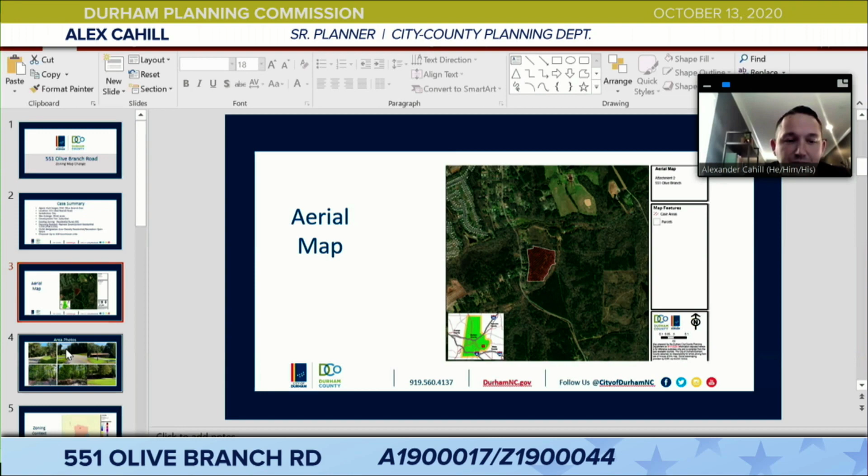The current FLUM designation is low-density residential recreation open space. This proposal is to build up to 108 townhouse units. You can see the aerial map showing the location of the site, right next to the intersection of Doc Nichols and Olive Branch Road, just east of that. You can see the area photos here—there's a lot of heavily treed areas surrounding and adjacent single-family homes near the property.

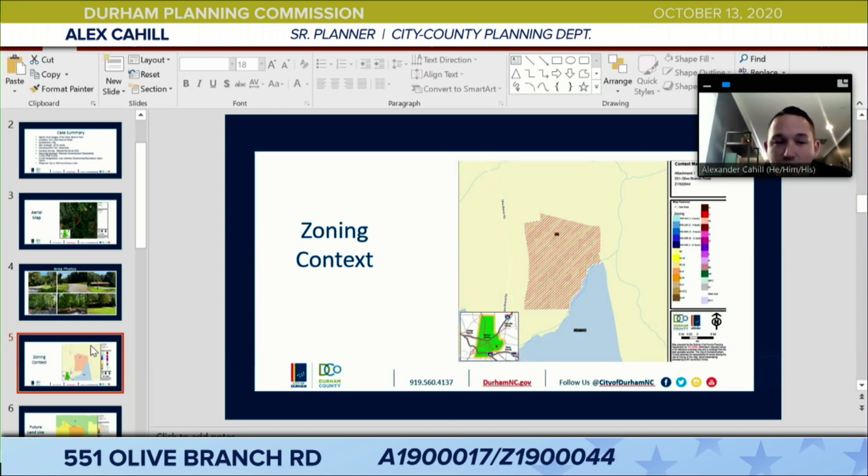For the zoning context, it's currently residential rural, and the proposal is to move toward a PDR 5.556. Some of the text commitments we want to note for this applicant's proposal include limiting the number of units to 108, a minimum 60-foot right-of-way dedication for the proposed collector street, a minimum of 5 feet of additional asphalt to be provided for the full frontage of the site along the east side of Olive Branch Road to allow for a bicycle lane, the construction of an exclusive southbound left turn lane with adequate storage and appropriate tapers on Olive Branch Road, and the construction of a continuous 3-lane cross section on Olive Branch Road as well.

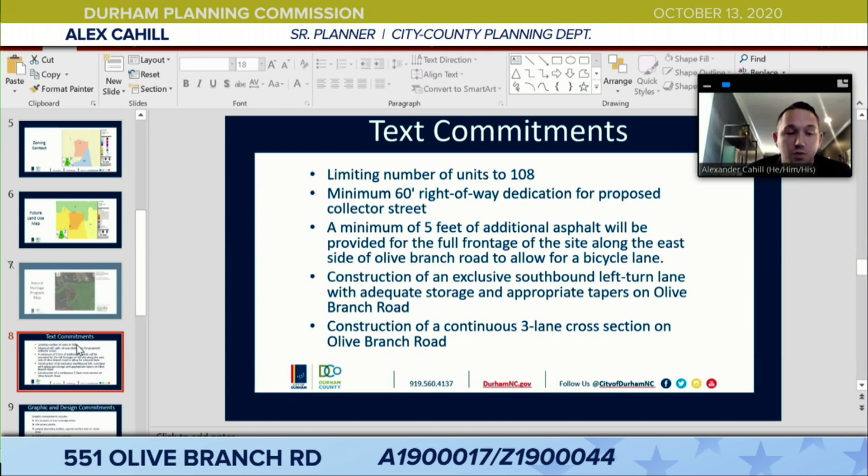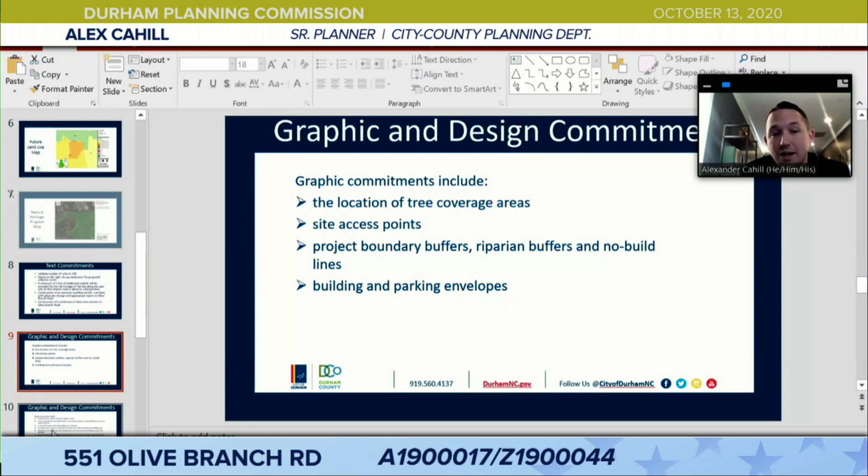Graphic and design commitments on this development plan include the location of tree coverages, site access points, project boundary buffers, riparian buffers, and no-build lines. This is a 100-foot stream buffer with 10-foot no-build setbacks, and the building and parking envelopes.

Additionally, there are graphic and design commitments on this development plan that include gabled roofs, accent materials that include brick or stone masonry, and a varied color palette. Outdoor decks or patios with a minimum of 40 square feet will be provided on all dwelling units. Front-facing garage doors will have windows, decorative details, or carriage-style adornments. Windows on the front facade of the dwelling include shutters or trim, and windows which face a public right-of-way on the rear or side elevation of the dwelling will include trim as well.

For the tree save on this, the required tree save is 20%, and the applicant on the D plan is committing to a tree preservation of 20%, all through the preservation of the existing tree coverage on the site.

Staff has done a review against comprehensive plan policies. It is consistent with the FLUM designation of low medium density residential, the suburban tier as defined, contiguous development patterns, the current infrastructure capacity as shown in the staff report, the school level of service standard, and the development review of adopted and regional bicycle plans. Additionally, this is compliant with the natural heritage inventory, the open space master plans, and the residential definitions. Staff does determine that these requests are consistent with the comprehensive plan, the public interest, and applicable policies and ordinances.

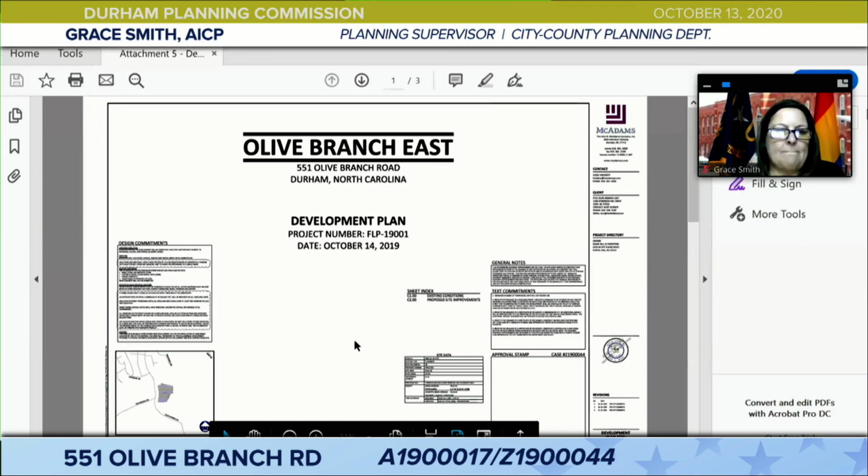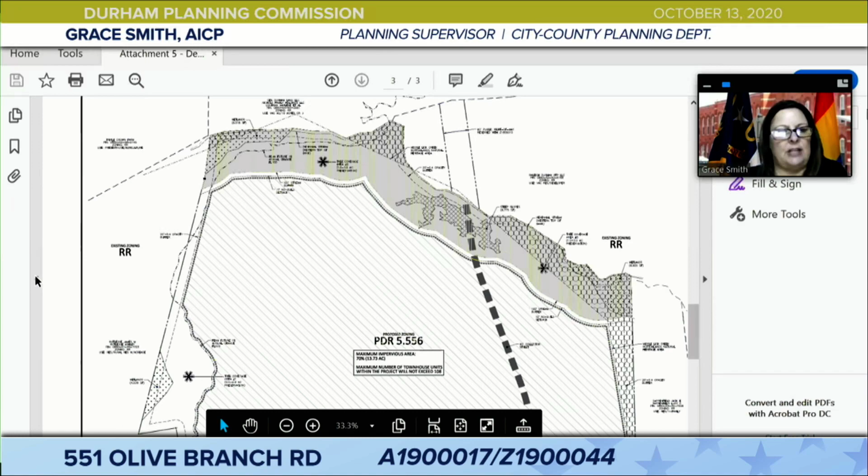So on the development plan sheet, right, so to the left, Alexander, yeah, if you want to go to the bottom left of the development plan sheet, there's a notation there where that point of access is being shown. There you go.

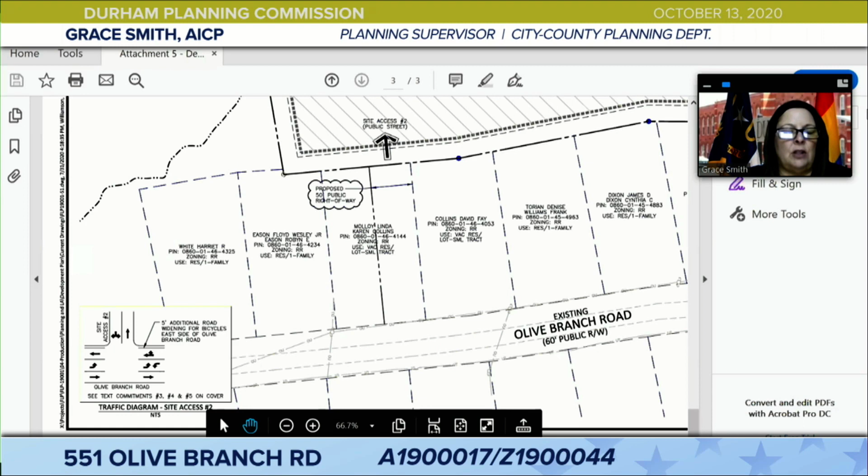So I would like for Mr. Ghosh to address this because he's done a lot of research on the order of how this should happen. We made a note in the staff report as to why this would be non-conforming for now, until it gets to site plan and is entitled at that point.

There is a proposal to put in a 50-foot public right-of-way there, and what you'll see is when that is installed, or when that is platted, it would leave a strip. I guess it's 50 feet, a 50-foot strip that would technically be a non-conforming lot that the applicant could add to their proposal through their site plan and decide how they're going to use it at that point in time.

There's no way to address it at this point through the development plan stage, other than to call it out and be sure that it's addressed at the site plan stage, so that we don't create a non-conforming lot when that right-of-way is platted. So it's.

So let me, if I may. So it's my understanding because this is more than 90 units, we've got to have two access points, right? And so this would be the second access point.

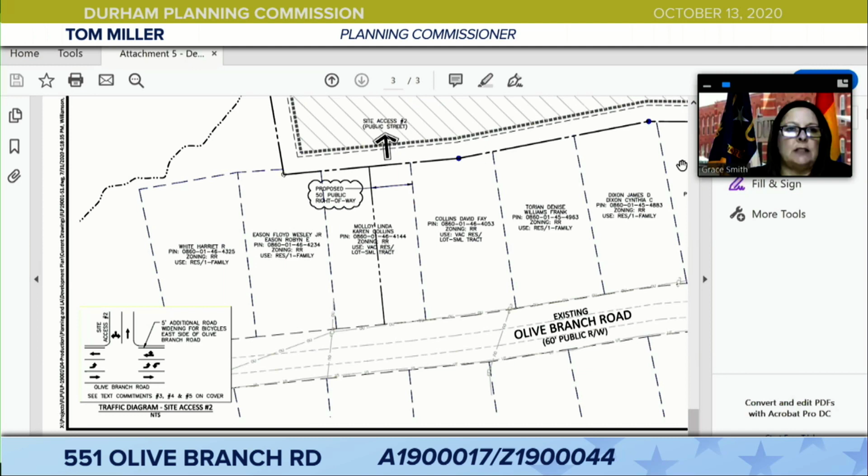Correct. And help me understand, I thought the UDO doesn't allow us to do rezonings or approve projects that create nonconformities. Who actually owns this piece of land? I'll let Mr. Ghosh answer your question.

It hasn't been created yet. We called out that it could be, if it's not resolved when the access is platted at the time of site plan. We wouldn't allow them to create the non-conforming lot.

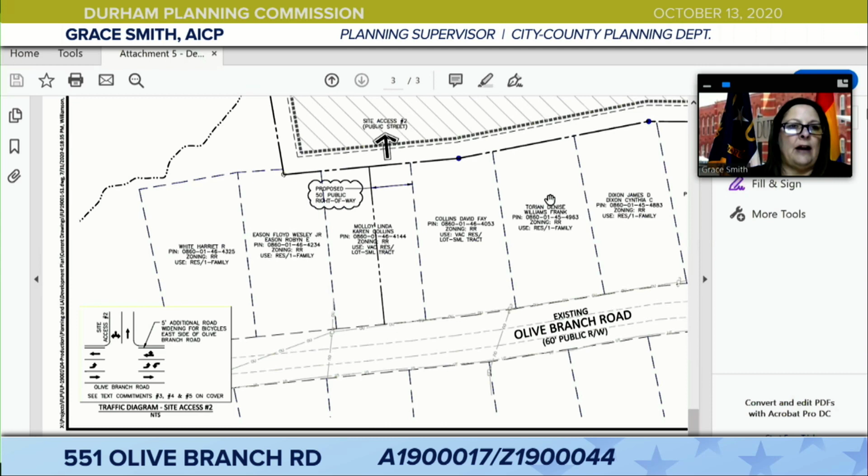I don't understand. I don't understand when you say it could be. It has the appearance that it could be. We would not allow that at site plan. If they could not rectify this situation at site plan, they would be short in access and potentially not be able to build their project.

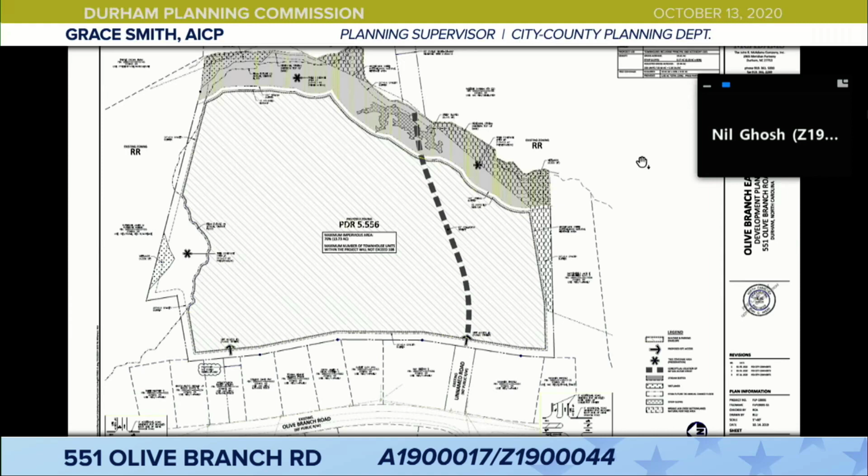So, Mr. Ghosh, can you explain the background on the ownership and these two lots, or this one lot, and what's going on, please? Sure, absolutely. The lot currently is not owned by the applicant. However, the applicant does have it under contract.

The main issue with the nonconformity, you're right, Commissioner Miller, that above 90 units requires two points of access. And that would be our second point of access. That's why we've shown it there with the arrow.

The problem is the additional parcel is not part of the zoning request. This came up after the development plan had been submitted. So what we're unable to do is make any commitment that's related to the parcel that is not part of the zoning. However, so we can't do that through the zoning.

If this rezoning is approved, it would not create any non-conforming situation. The potential for a non-conforming situation would come in at site plan once that additional parcel is conveyed to the developer, and if a 50-foot right-of-way is dedicated through there, then there would be a remainder piece of land that is not conforming with that zoning district.

However, the UDO does allow for non-conforming lot sizes if they are part of an open space lot, like a common open space lot for the community. That's like where you would see the buffer around the community. Generally that's going to be its own lot, and typically it's not usually wide enough to meet the minimum lot requirements for a typical residential zoning district.

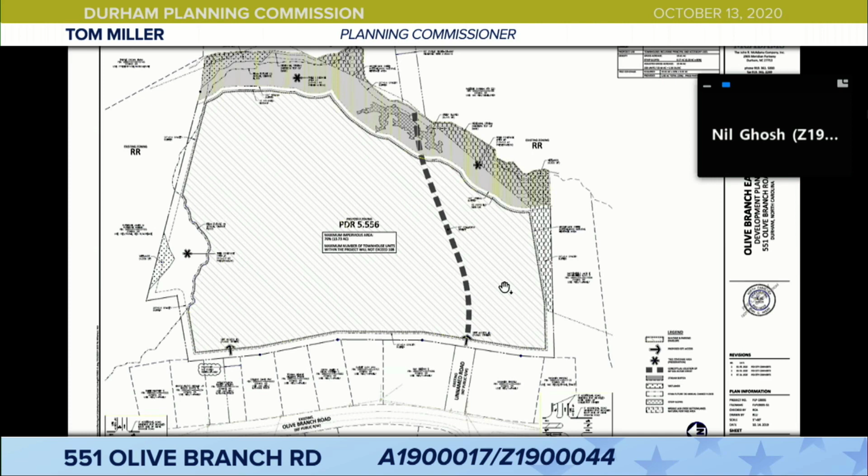It seems to me that if you have this parcel under contract, you should have included it in the overall rezoning. Although there is no doubt that if the timing allowed us to, that would have been the cleanest way to do it.

Well, again, I'm commenting, I'm not asking. I'm just uncomfortable with this. It seems to me that this is too complex. I'm not sure it's actually consistent with the spirit of the UDO for us to approve a rezoning which has built into it the possibility of a violation of the UDO. And I know you're in a hurry to get this approved, but I think the thing to do is to fix this and wait a cycle while you do it.

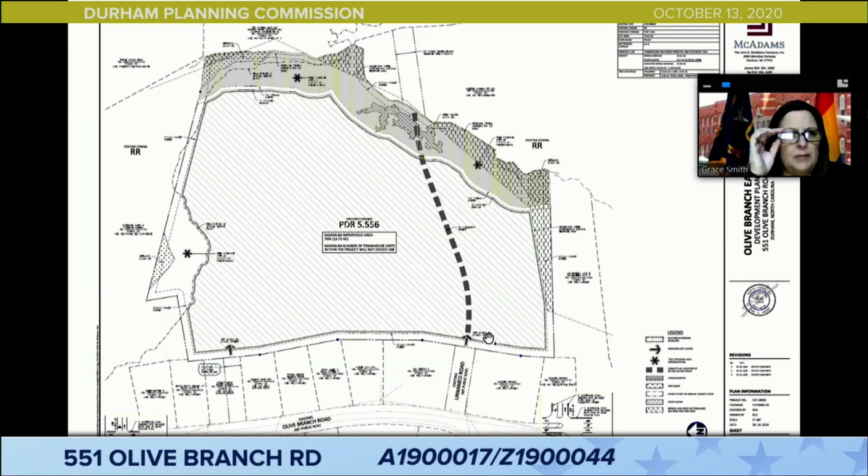Grace, if this were withdrawn and then resubmitted with this lot that is on Olive Branch Road added, would that be a start over or just a modification to the current zoning case? No, it could be modified at this time. It may cost them a cycle, and the zoning's not really creating a nonconformity.

I think we were mostly just wanting to point out to you all that the second point of access will not be firmed up and actually a real access until the time of site plan.

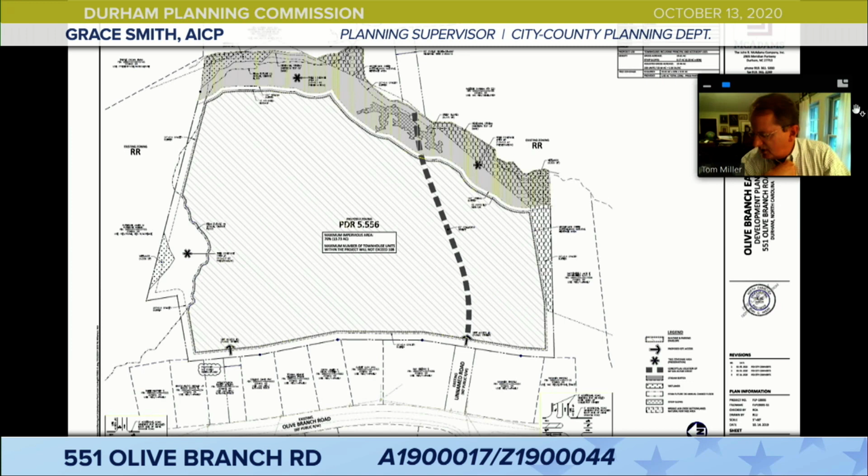And you're satisfied that the commitments don't require them to build 108 townhouses? It would be up to 108 townhouses. Right, they could not dip below the significant deviation, the significant change, which would be the 20%. They'd have to stay within 20% of what their density calls for.

But they can do that, that's very close, isn't it? It's close, but I think it works out. I think we did that math already and it works out.

Let me ask you this. Could this be fixed with a commitment that makes it clear what will happen with regard? In other words, we would wind up with a project that spills outside its development plan boundaries, even if it works the way Mr. Ghosh wants it to. I'm not comfortable with that.

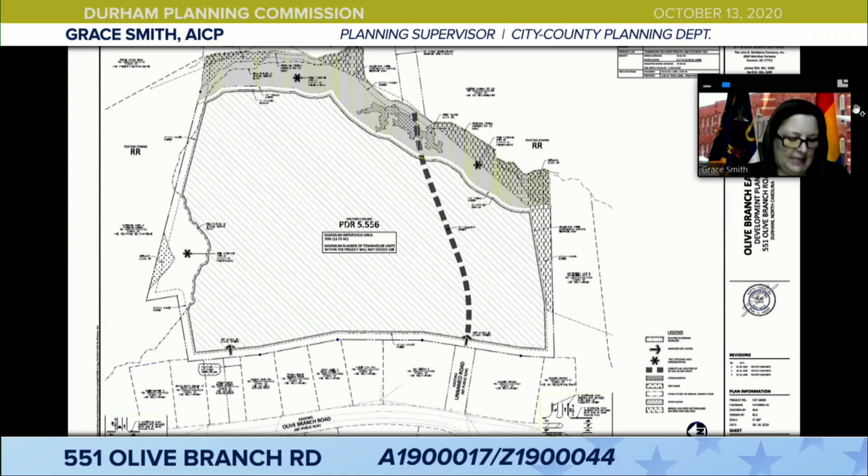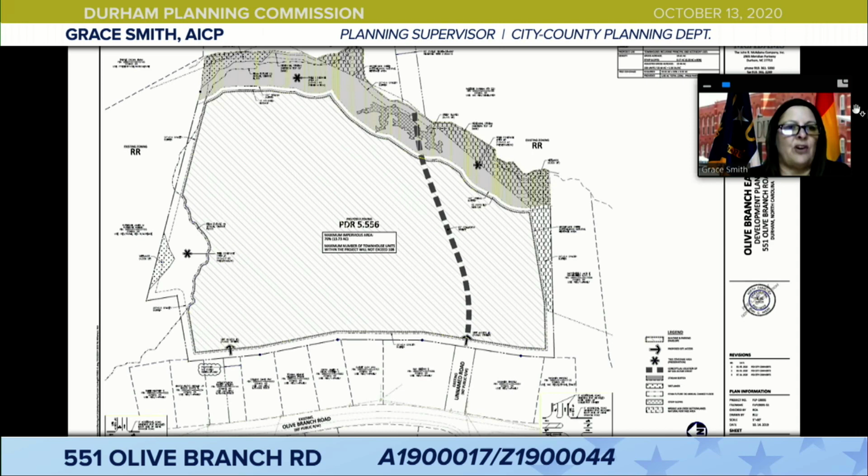The staff had the same problem with this. We've tried to figure out what kind of commitment could be made to make this more clear. However, because the property is not included in the development plan, they can't make any commitments regarding that property because it's outside. I answered my question before I finished asking.

That's right. So we basically told him that he was kind of proceeding at his own risk, because if he can't, I think that it would be limited to 90 units. I think there's a significant ripeness problem here, and I don't believe this is ready for prime time. But I've got more questions.

I noticed that there is this through right-of-way that goes right through the steep slope area, and I'm not particularly happy with that. But I will confess, this is a funny piece of property. I have not actually gone onto it. I drove back and forth on Olive Branch Road. I parked on Doc Nichols Road to look at it, but it's hard.

It rises up a little bit behind these houses that face Olive Branch Road, but you don't have any clear indication. From my vantage point, I didn't get to see what this looks like back there, but I know that when slopes are steep enough in order to get a drawing on the map, they're pretty darn steep.

I'm troubled with a plan that plans for a road I don't believe anybody's ever going to build. I just don't see a connecting street going through there. I do not see enough activity and development in this area to justify it. So that's another problem I have with that.

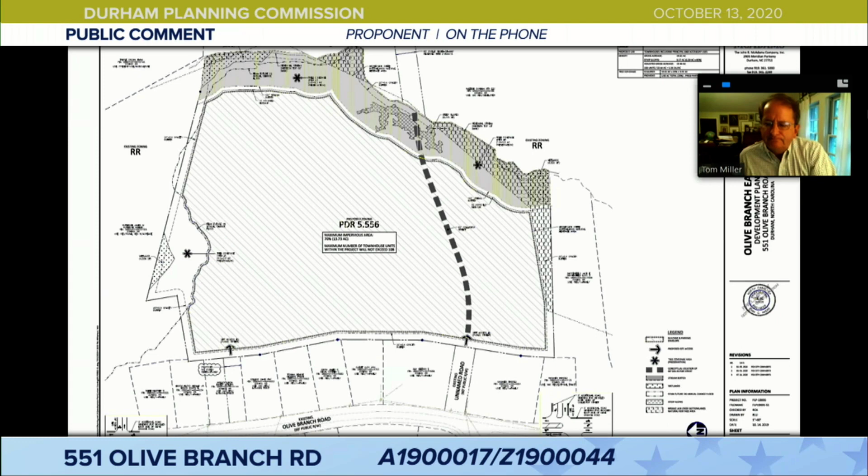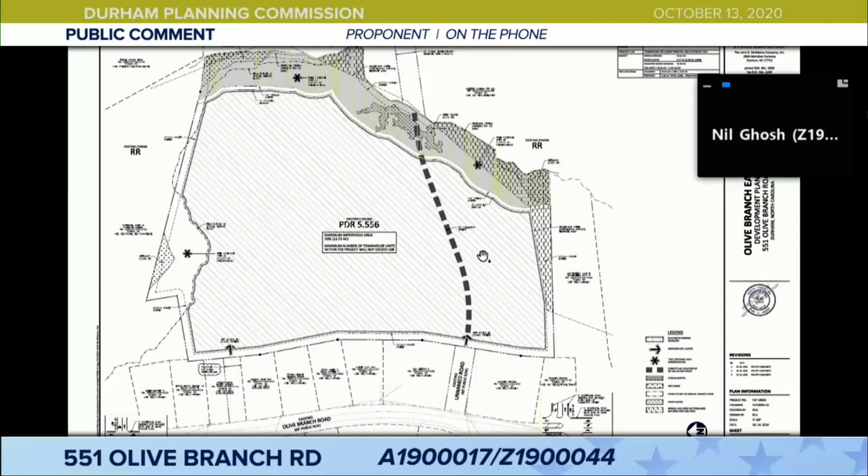No, I think I understand your point, and my understanding is yes, there will be windows on the ground floor of at least some of these units that are just windows, not the door, not the garage door. All right, thank you, that really helps me understand a little bit.

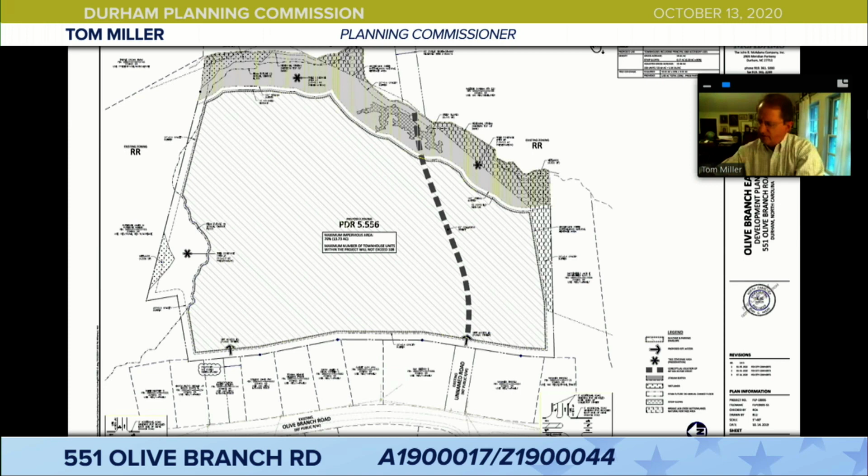And two more comments. I guess my biggest problem with this is, I have a question for staff. I'm a dinosaur, and you send me a paper version of this staff report. When I look at attachment 3 concerning the future land use map, I don't understand it because there is no legend that tells me what the colors mean.

But the map you sent me has several colors on it, and I want to make sure I understand that, except for the part of the map designated very low residential, the rest is low density residential, and the gray shaded area is recreation open space. Do I understand the map correctly? Yes, that is correct, Commissioner Miller.

All right, thanks. So my biggest problem is that if we approve these two cases, because this is a FLUM change and a rezoning, we will be creating a 20 acre, I'll give them the other portion of an acre, island of a different category in the future land use map, in an area that is completely surrounded by lower densities, and in projects presented to us up to this point that have all been for lower densities.

So I'm not sure I understand a justification, as a simple matter of consistency, why this 20 acre parcel, which doesn't even have its own direct access to Olive Branch Road, becomes an island of higher density development than everything around it, and everything that could be around it, and everything that's actually in the hopper and coming. So I'm very uncomfortable with that. Those are my points, Mr. Chairman and members of the commission.

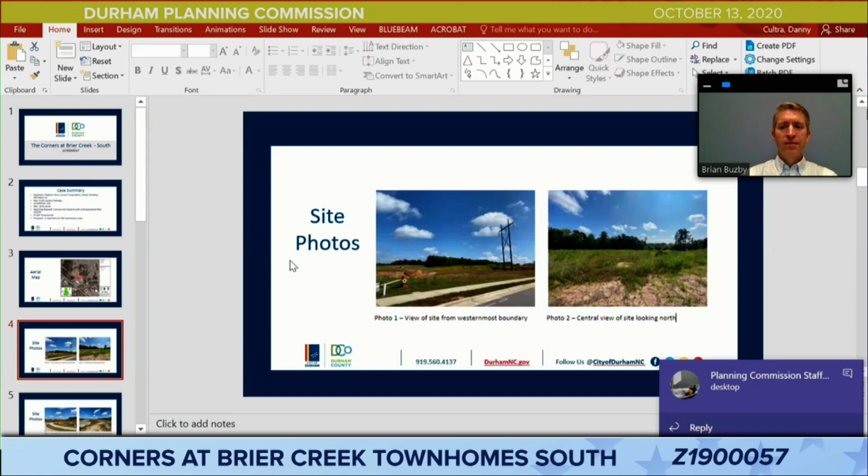All right. The request for Z19-00057 for zoning map change has been received from Stephen Dorn of Lennar Corporation and Jesse Hardesty of McAdams Company for one parcel of land located at 4228 Corners Parkway. The total land area is 18.91 acres. The applicant is proposing to change the zoning designation of the site from commercial general with a development plan, CGD, to commercial general with a development plan, CGD, for a maximum of 138 townhome units. No change is proposed to the future land use map designation of commercial, which is consistent with the zoning request.

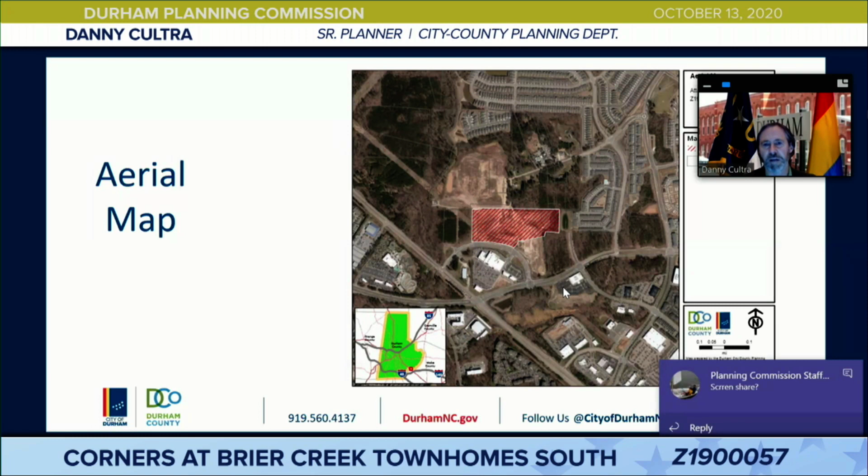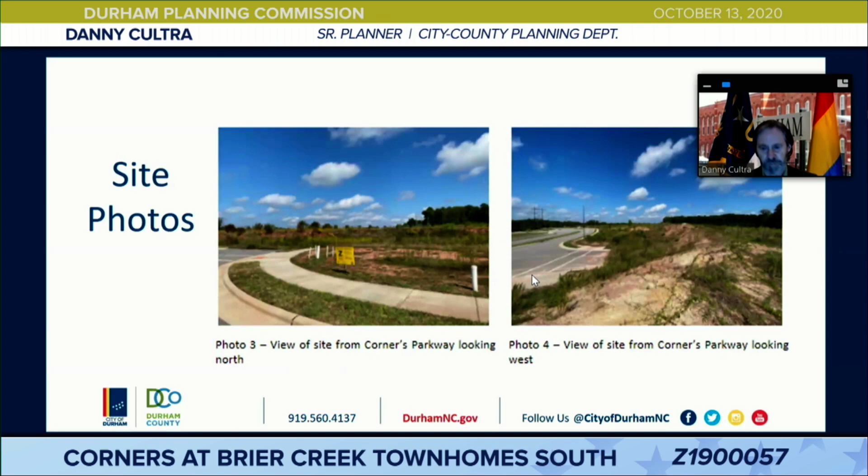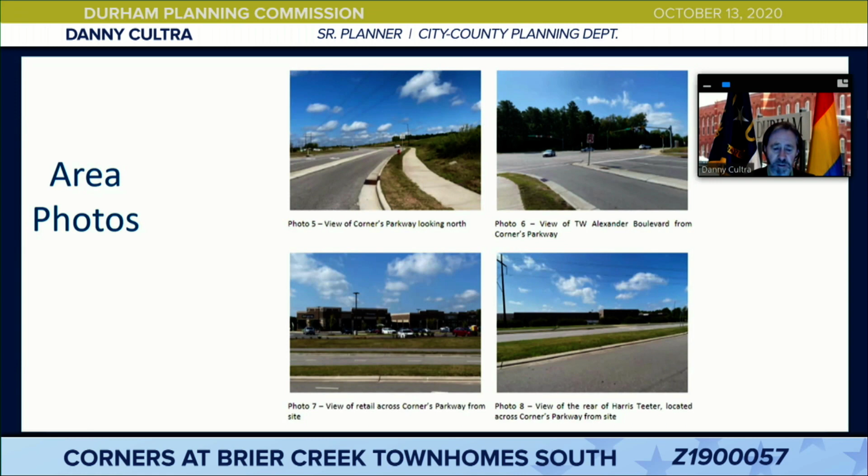The aerial map indicates the location of the site at Corners Parkway near Highway 70 and T.W. Alexander. The site has been previously cleared and graded, as you can see in the site photos. The area around the site is in various stages of proposed and existing development. A mix of commercial shopping centers, residential development, and office and medical uses can be found in the vicinity, with some of the commercial uses a part of the existing CGD zoning development.

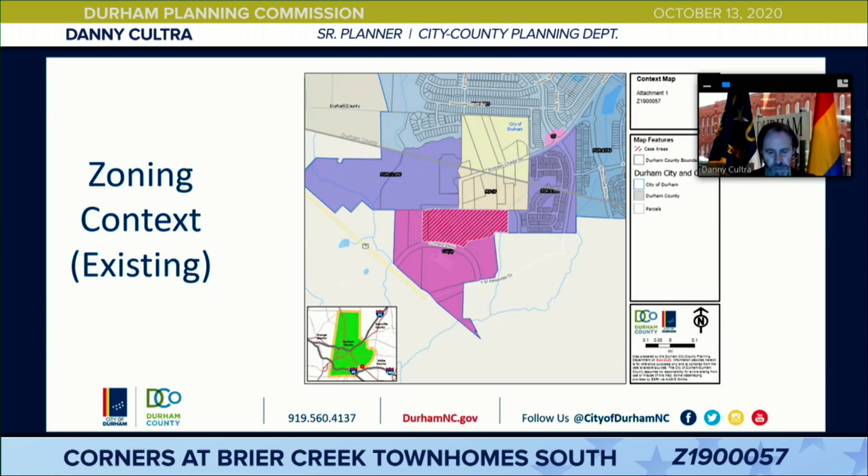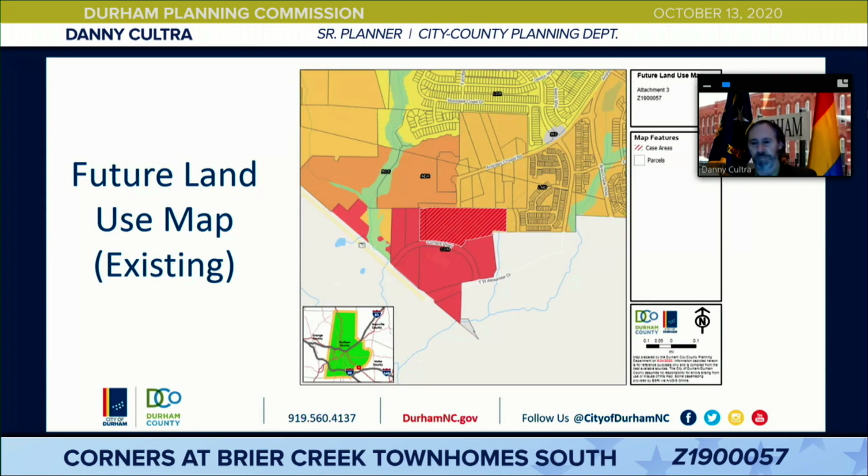The site is CGD and adjacent to commercial CGD zoned and planned residential PDR zone and RS10 zone properties. The proposed zoning of CGD is consistent with the future land use map. The development plan indicates the required commercial general dimensional standards, uses limitations of 3 access points, environmental features, required tree coverage quantities and locations, required project boundary buffers, and impervious surface restrictions. The key commitment includes restricting the site to a maximum of 130 townhome units as permitted building type, a maximum impervious surface area not to exceed 70% or 12.45 acres, and completing the following traffic commitments for Corners Parkway and the site driveway, Harris Teeter driveway, prior to issuance of certificate of occupancy.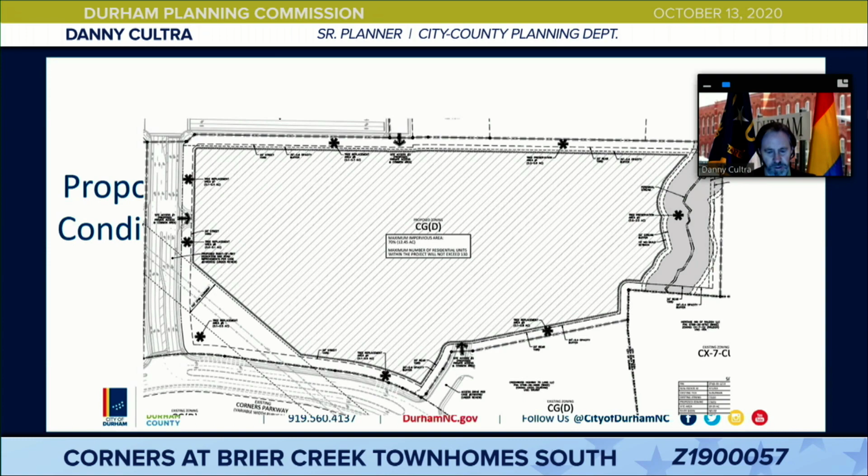Which include constructing the site driveway as a full movement driveway opposite Harris Teeter driveway, constructing an exclusive eastbound left turn lane of Corners Parkway at the site driveway with adequate storage and appropriate taper, and restriping the northbound approach of the existing Harris Teeter driveway as an exclusive turn lane and a shared through turn lane. Staff analyzed the proposed development for consistency with the comprehensive plan policies and determined that the request is consistent with the comprehensive plan and the applicable ordinances.

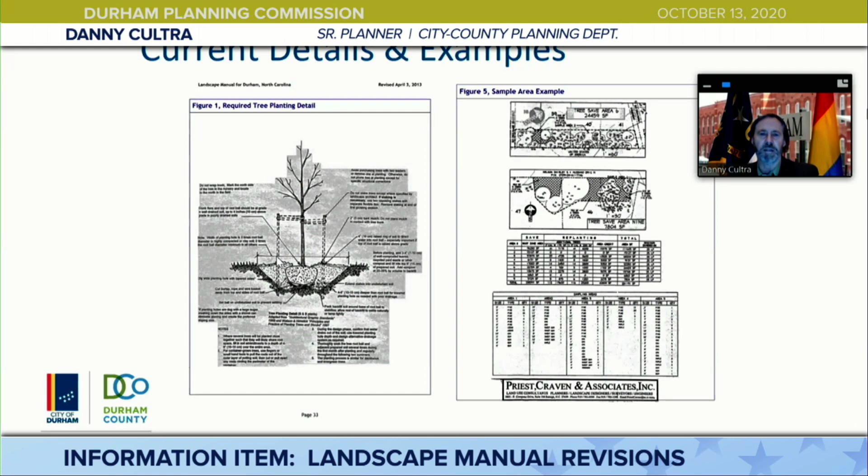We also revised our planting details. The manual contained poor quality graphic details and illegible text, and the goal was to update those with cleaner and more legible details. We also wanted to modify all details to meet current best practices and industry standards. And these are our old details. The text is very illegible, and we updated to industry standards and cleaned up all of our details.

Finally, based on dialogue with our environmental partners, we committed to reviewing potential updates on a 5-year cycle, which is much more frequent than has been performed in the past. This will ensure that any future potential invasive species are placed on Durham's prohibited lists, and as industry standards change, we can update the manual accordingly.